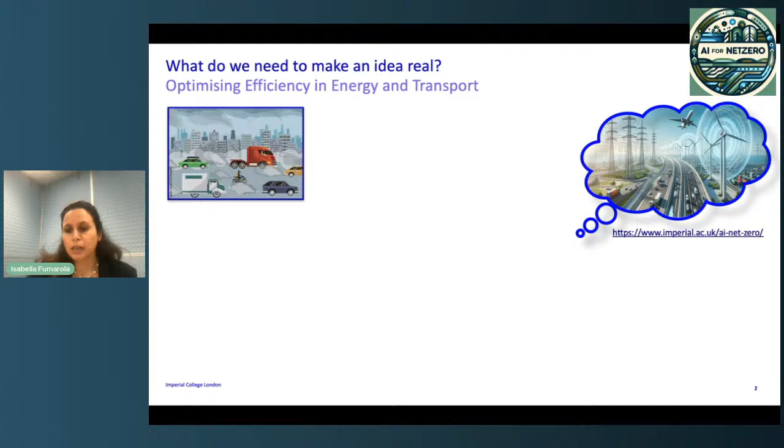The idea is that AI has a lot of technologies now available for different applications. Here are some examples: power, wind turbines, trucks, or planes. The idea is how can we make this theory applicable to real life solutions.

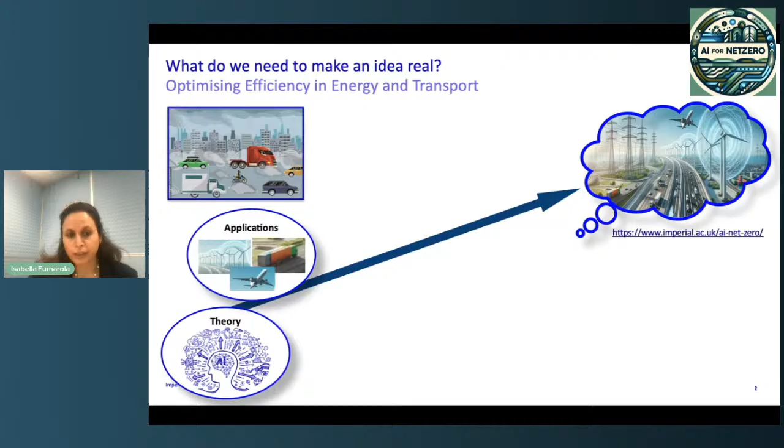What is the missing point to make this real is an experiment or proof of concept. But experiments don't come without challenges - they obviously come with a lot of challenges.

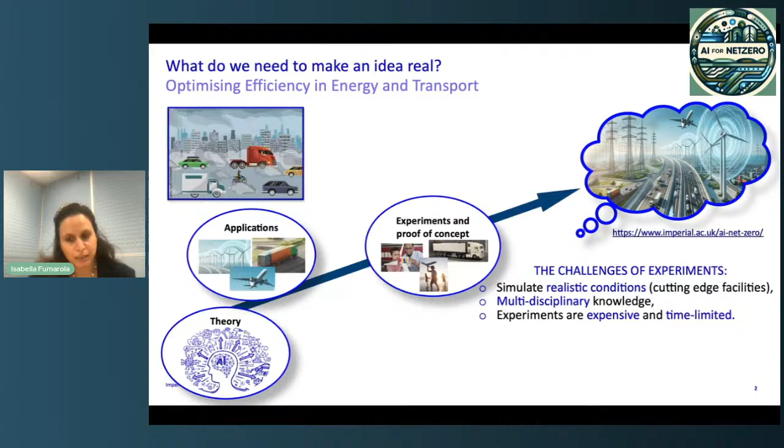First of all, we need to simulate realistic flow conditions, realistic conditions in general. For this, we need cutting edge facilities, and we need multidisciplinary knowledge to carry out any type of experiment. They are expensive and time limited. What I really want to show today is the different elements that build up the experiment to eventually make the solution real.

I said I'm an experimental aerodynamicist, and the first question that can come to mind is why do we need aerodynamics? If you look at all these applications, whether transport or energy source, the common characteristic is that all these systems work in a fluid flow - that can be air, or if we start thinking about ships and submarines, can also be water.

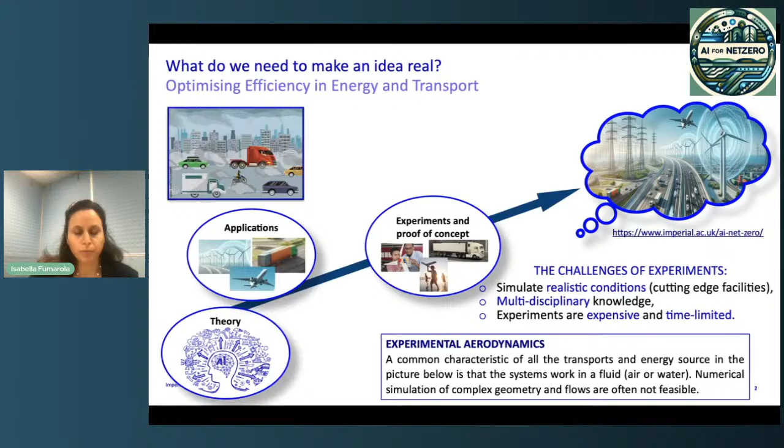Often when you want to go closer to realistic conditions, having a numerical simulation of complex geometry and complex flow is not always feasible. More specifically, the project we are working on in AI for Net Zero is focused on heavy road vehicle aerodynamics.

And the main motivation is that if we look at the greenhouse gases emission, this is 2023 in the UK, what we can notice is that about 35% of the total emission are due to heavy road vehicles and light-duty trucks. And we can also imagine just by looking at the amount of time we order something online, how long it takes, like how many trucks and vans are bringing goods to our houses, how this topic becomes quite important.

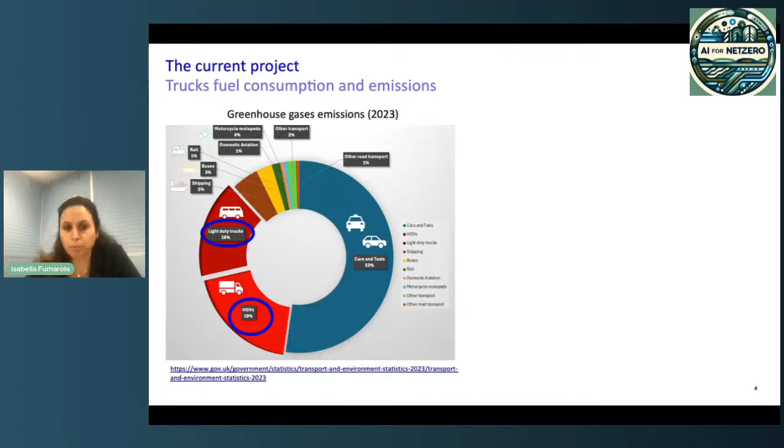And more specifically, if we consider the 50% of the power from an engine of a truck that is used to overcome the aerodynamic drag, so the aerodynamics plays quite an important role in this problem. If we reduce drag by 10%, we can estimate that the fuel consumption will be reduced by 5%, just to give an idea.

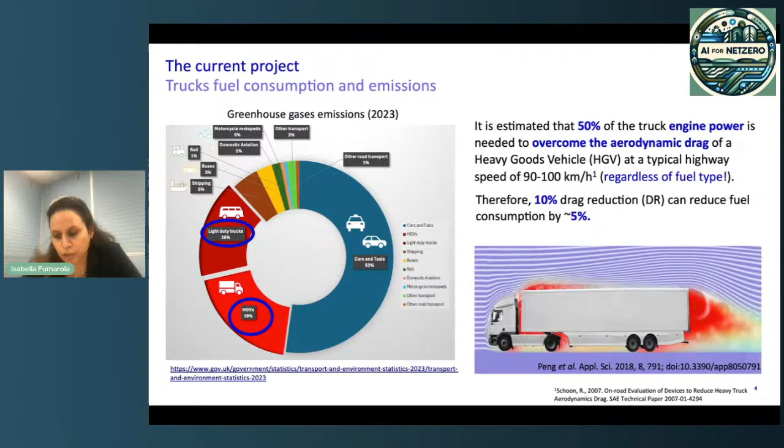So if we look at the flow around a truck, like the one here on the bottom side of my slide, we can see that there are a lot of areas, gaps, and the flow under the vehicle. That is where the flow becomes more detached from the vehicle itself, and it dissipates more energy. But in particular, 25% of the aerodynamic drag comes from the wake, and this is the reason why we mainly focused on the wake.

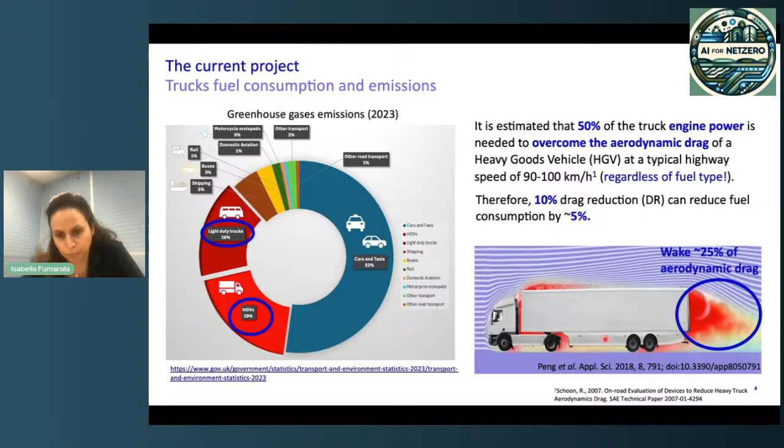In addition to that, you can see that there are a lot of devices like the fairing on top of the front of the vehicle, or this skirting next to the wheel, that have already been implemented to improve the aerodynamics of the truck.

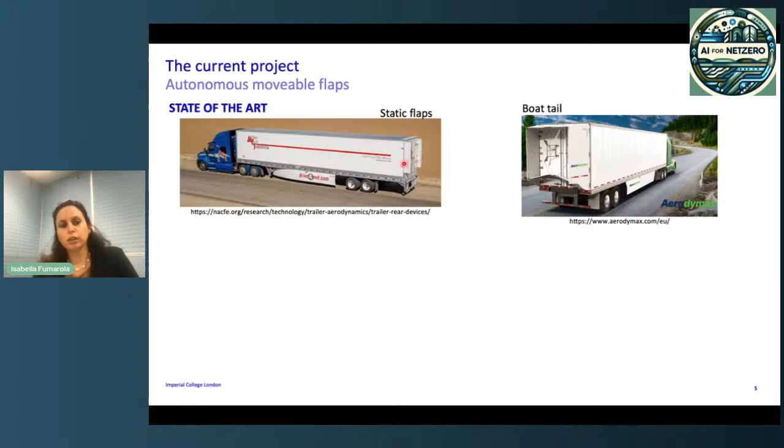So what is the state of the art? Commonly, this type of vehicle are seen more in US, I've been told, than in Europe, but solutions that are actually implemented include static flap or boat tail, and these are static solutions that tend to streamline the flow around the vehicle. But the question is, can we actually do more?

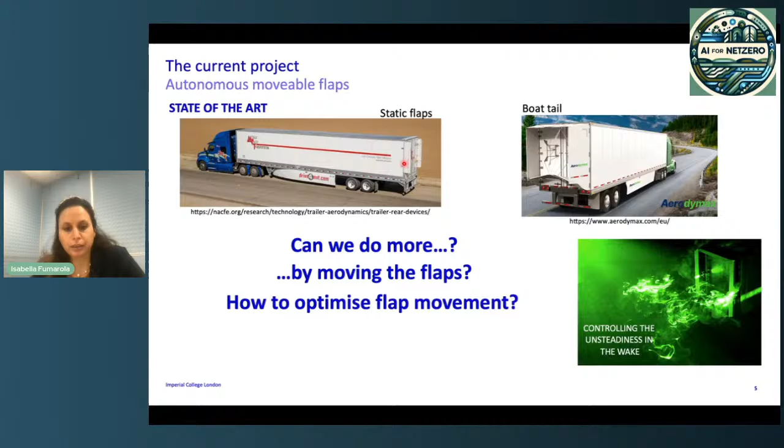And can we do more by controlling the unsteadiness in the wake? Because if you think about fluid dynamics, obviously the flow is very chaotic and is moving and is creating all these little structures that are moving around, and they're responsible for dissipating energy. So can we improve the current solution by moving the flap? And how can we optimize this movement?

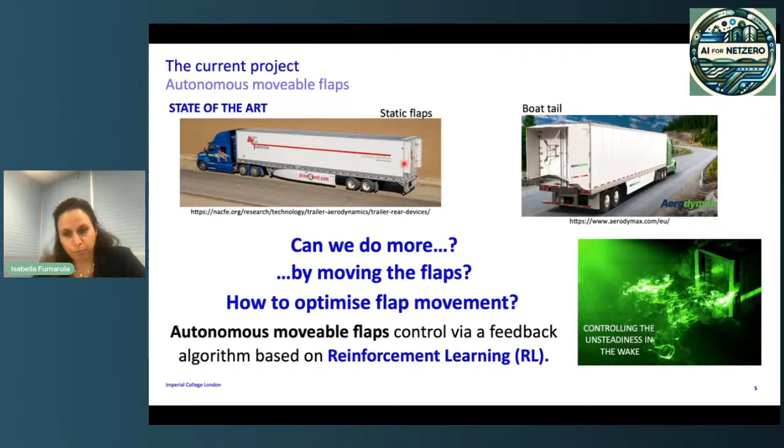Well, what we're doing is that we are looking into applying a reinforcement learning algorithm that can control the movement of the flap via feedback from some sensors that are on the rear of the vehicle. So I mentioned we do this experimentally. The next few slides will explain how we built up our experiment, what's needed, and then I will move to some preliminary results to give an idea of where this project is going.

So the first element for an experiment is obviously the model. So we use a scale truck 1 to 14 because we wanted, as I mentioned, a realistic geometry.

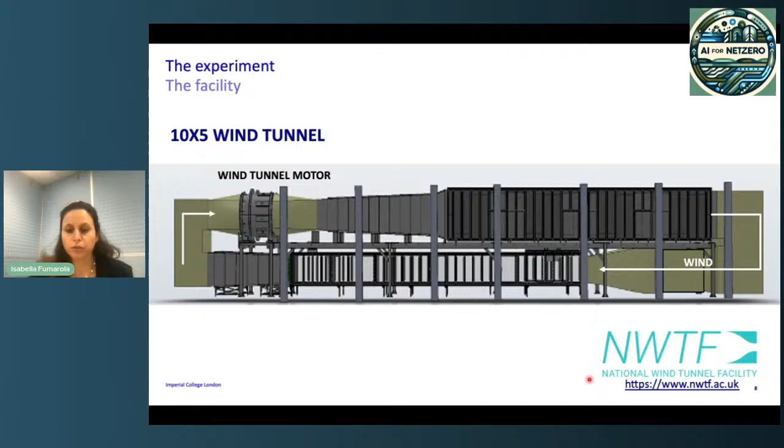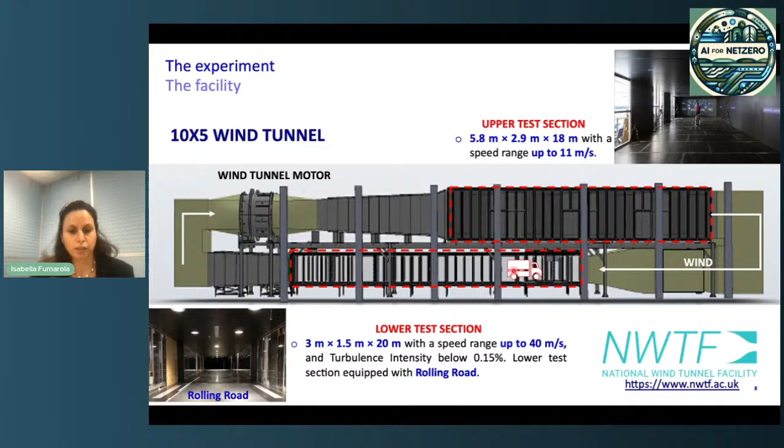It has two test sections, one on the lower part and one on the upper side. The one on the upper side is quite big, it's like 5.8 meters by 2.9, up to 18 meters long, and it can reach up to 11 meters per second. The one on the lower is a bit smaller in section, but it reaches 40 meters per second, and it is equipped with a rolling road. So our truck has been placed in the lower test section, and the rolling road is one of these elements that are needed to reproduce real life conditions.

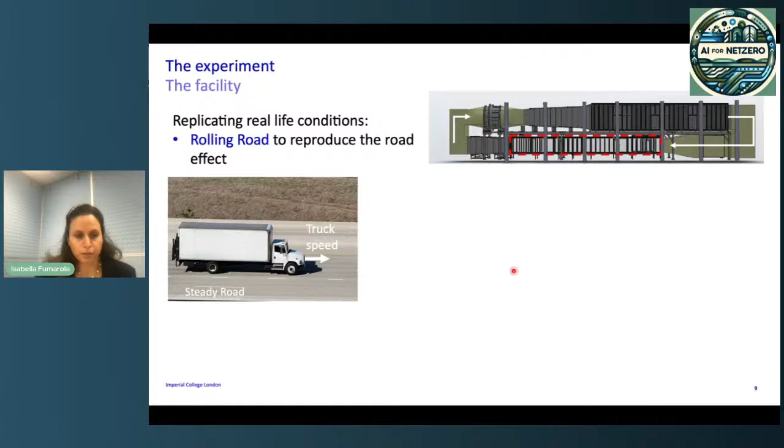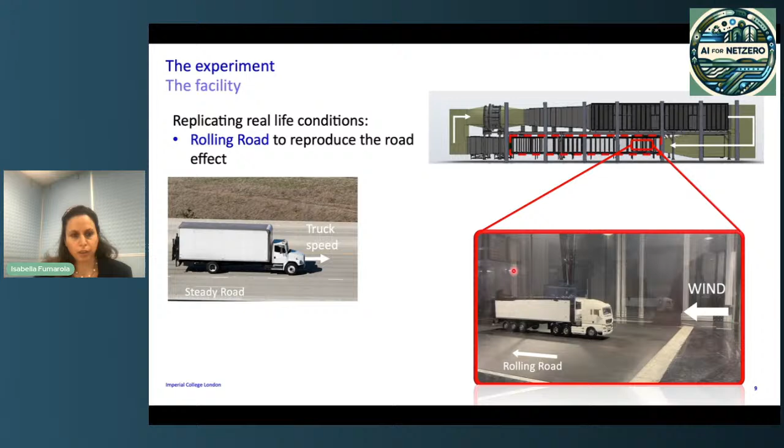So if we look at a truck moving on a steady road in steady air, what happens is that obviously the truck is moving at a certain speed, the road is not moving, and the air is still. When we move to the wind tunnel, the reference system changes because the truck is stationary, but the wind is actually blowing against the truck. And in this case, if we want to replicate the effect of the road, which is normally called ground effect, we have to move the ground, and this is what we can do in our wind tunnel.

Another aspect quite important is what happens if the truck is driving on a road with wind.

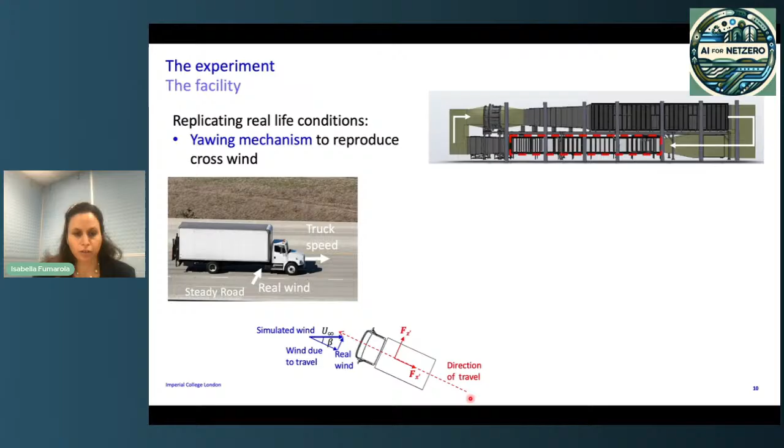So the wind is not still anymore, and it can come from any direction. This is what we normally refer to as the yaw condition, in which the component of the direction of travel is different than the direction of the wind. So what we can do is turn the model by a certain degree and replicate exactly the same condition in our wind tunnel.

Another aspect is obviously measurement techniques. I mentioned pressure and forces, but when we want to investigate the flow field in the wake and understand the flow physics, what we're interested in is measuring the velocity in the wake, in time and space.

This is one example of the measurement technique we used, which is volumetric particle tracking velocimetry. We fill up soap bubbles with helium so they're quite light. When you're in the wind tunnel, they'll follow the wake or the flow around your body, in this case the truck. Then we mount 4 cameras looking at this volume, capturing images in time.

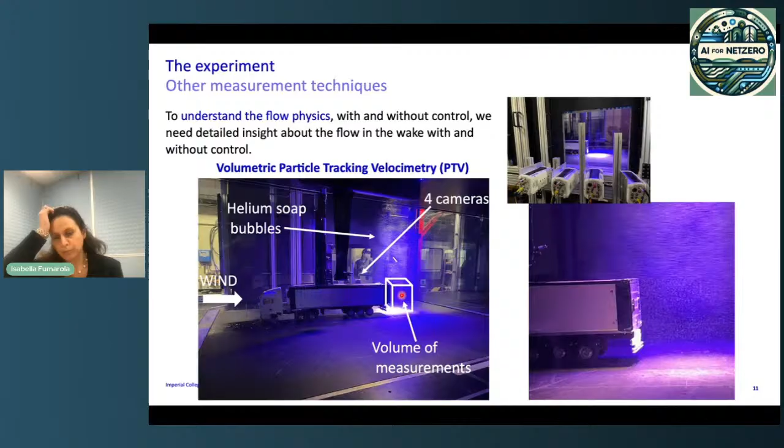They're like high-speed cameras. What you end up having is a number of particles moving around, and at first look they may look chaotic, but you can see some of the vortices.

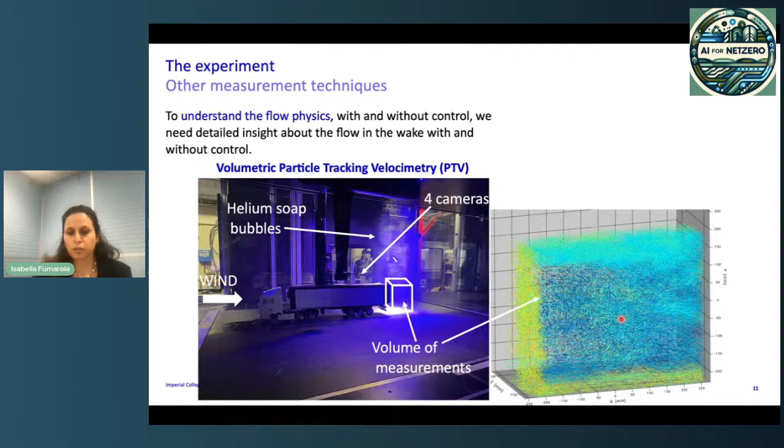When you analyze all these particles in your truck, you can derive the speed of the flow in that particular location. If you look at the mean flow, we can identify the main structures created within the flow you're looking at. So for instance, this is our wake, and we have the primary bubble on top and a second bubble on the bottom.

And with this, I'm going to move to my last few slides about results. The way the project is structured is that we start with a baseline characterization, trying to understand the flow physics and what the wakes look like. The second part has been a static optimization of the flap angle and length. And then I'll show when the reinforcement learning takes over.

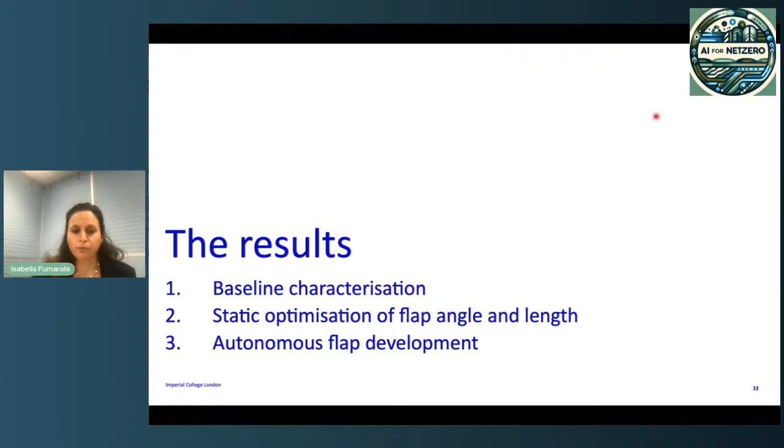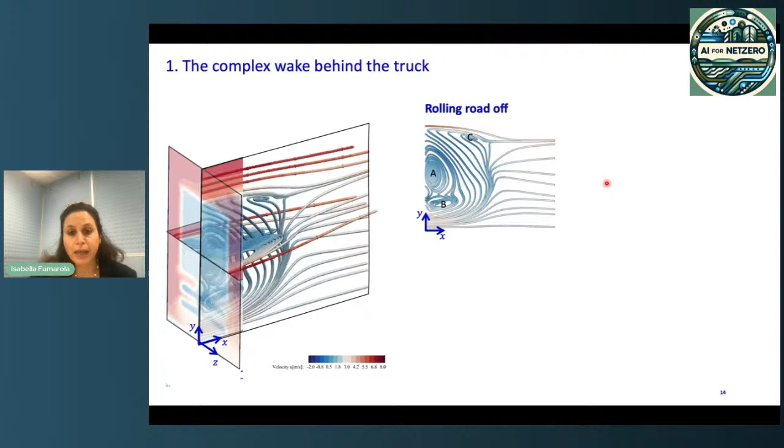So this is the wake behind the truck that I was showing earlier. One thing we can do is compare what happens when the rolling road is off versus when the rolling road is on. This is quite important for us because we can't always keep the rolling road running.

You can see in this case the effect of the rolling road on these vortices in the wake, A, B, and C here on top. The effect of the rolling road is a bit limited, more limited to the region next to the ground.

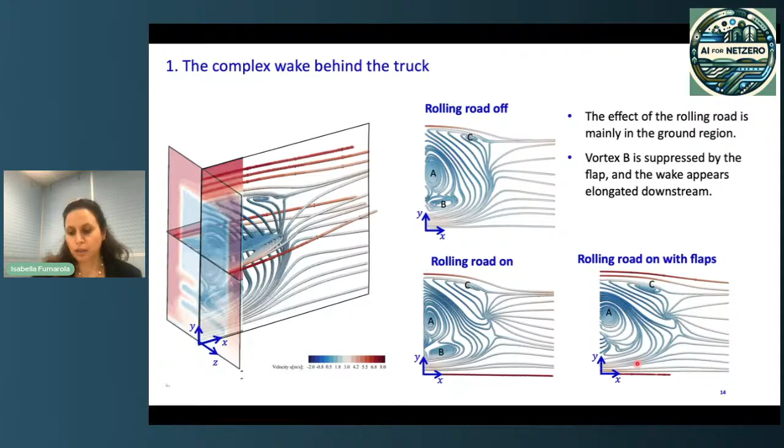Then we put our flaps, which are static, and again we can look at how the wake is modified by the flaps. The first thing that comes to eye is that now the wake is more elongated, and the vortex here on the bottom, which was B, has now disappeared. These are all elements that, with a bit more deeper analysis, will guide us towards understanding why already the static flap can reduce the drag.

Then we can move to static optimization. The idea is, what if instead of keeping these flaps at 0 degree angle, we want to optimize their angle? If you have a vehicle straight to the direction of travel, we can do a simple grid search. We moved the angle by 0.5 degree every time, and studied 4 different lengths. We found that the actual drag force is reduced by more than 20% in the best configuration, which is the one with the longest flap and an angle of 1.5.

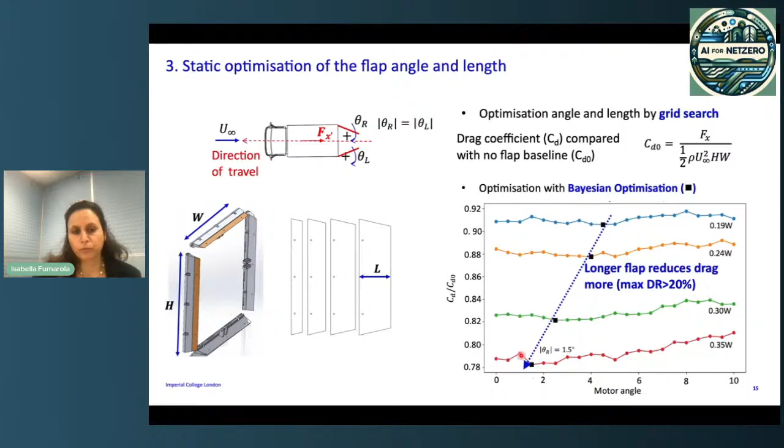Instead of moving each step with a fine resolution, another possibility is to work with optimization code. What we tried was Bayesian optimization, and the square in this plot shows the result of the static optimization for the straight track.

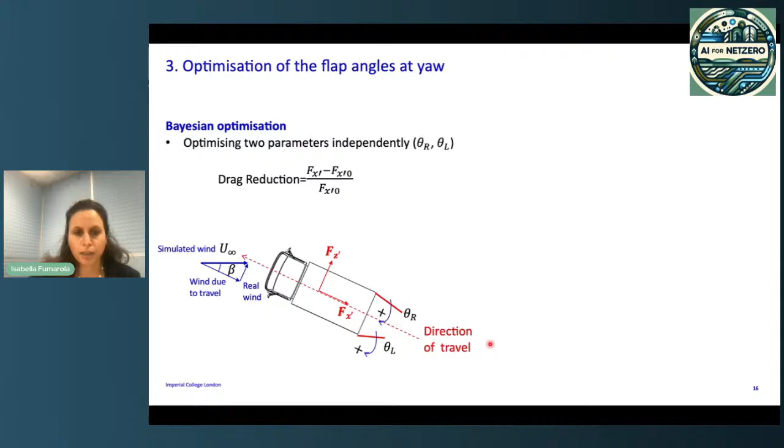Bayesian optimization becomes even more important when you want to study the yaw condition, because in this case the optimal is not necessarily that the two flaps are set at the same angle - they can actually be optimized independently. You have a number of points randomly chosen to start collecting a data set, based on which the algorithm decides the next step to optimize this function.

We can see that compared to the 0 degree case, we get a drag reduction. So instead of keeping the flap straight at 0 degree, if we now put the optimal angle, we increase drag reduction even more, by 1.3%. This is for a small yaw angle. When we increase the yaw angle, the increment we can achieve with an optimized angle at yaw is actually much higher.

But as I mentioned earlier, if we look at the flow in the wake, it's quite dynamic, not static. We use a lot of analysis like PSD or POD to understand how this dynamic part of the wake contributes to the loss of energy, because what we really want to understand is which are the most energetic structures.

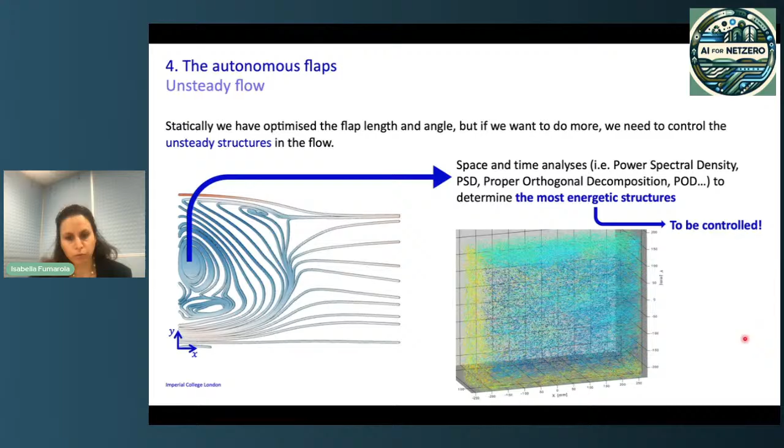Those will be the structures that we want to control. So when we look at the dynamics, how can we now make the flaps move in a way to actually optimize the flow, to reduce the drag?

In this case, we want to use feedback control. So our sensor - the first question is, where can we place the sensor? Obviously we cannot place a sensor in the wake of the truck that is following a vehicle moving on a road, but we need to mount the sensors on the vehicle itself. The first question we have to pose is observability: can we actually use this sensor to observe the state of the wake? That is what we want to control.

The base pressure on the rear of the vehicle, as I showed earlier, is a good indication of the state of the wake. So we use a pressure transducer on the rear face of the vehicle. Then we want to measure the drag, and for that we use a load cell. Our actuators are obviously our motors, which need to be fast enough to respond and control the wake. Our communication also needs to be fast, so we use a real-time communicator.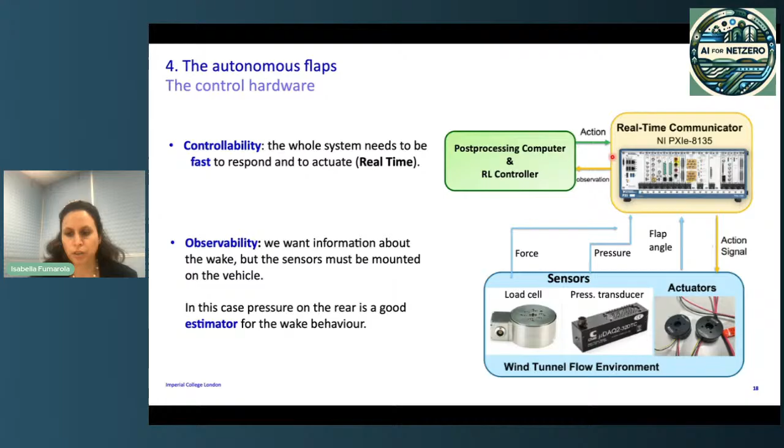We have a postprocessing computer running the reinforcement learning algorithm. Our real-time communicator sends the observation to the computer, and the computer returns the next action, which is eventually fed to the actuators.

A bit more detail on how this works: in terms of the reinforcement learning algorithm, we have our wind tunnel, which is the environment, and the state of the wake, measured by the pressure transducer. The agent decides which action to take at a certain time interval, which determines how the flaps need to be moved. This information is fed back into the environment, and if the effect is positive, an according reward is sent back to the agent, which decides the next action.

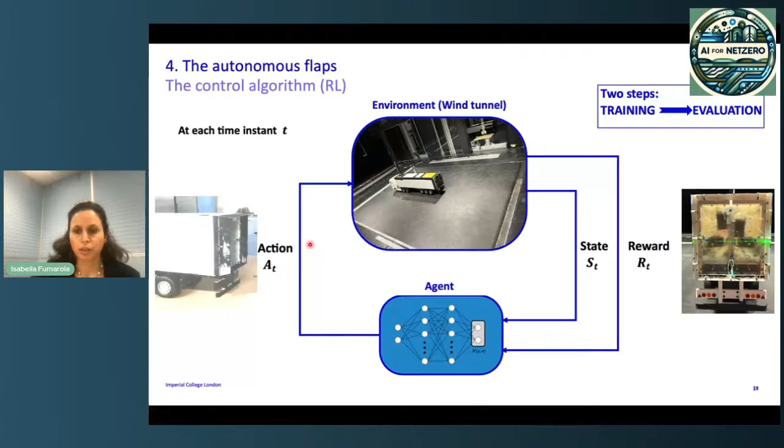The way this works is divided into two steps: one is training, one is evaluation. In the first step, the algorithm trains itself, and then, during the evaluation stage, it confirms what the training has suggested.

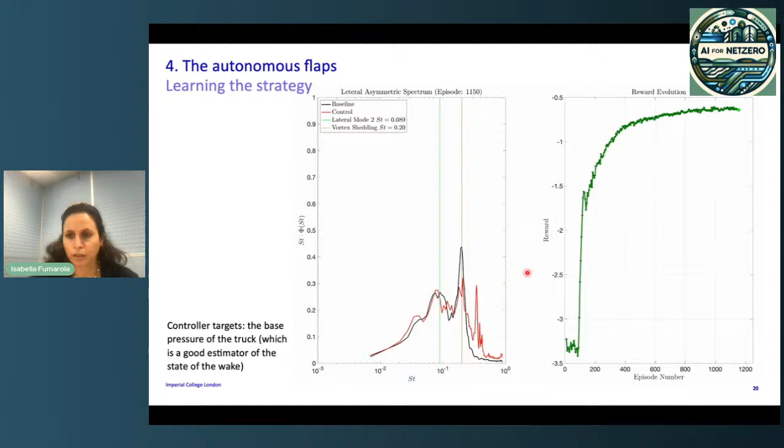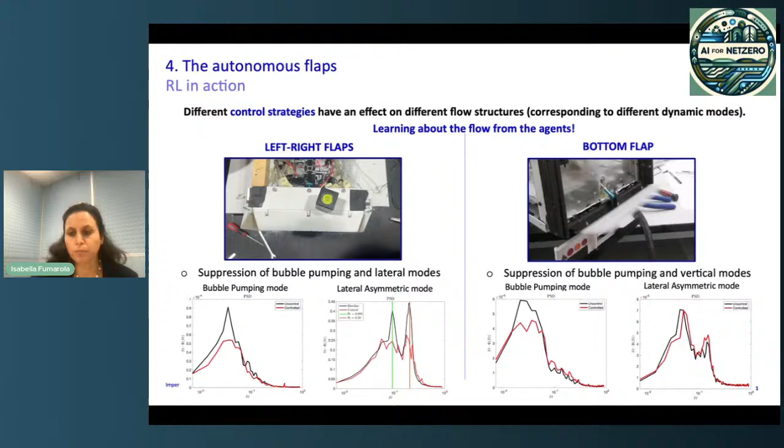Depending on whether you're using the left and right or the bottom flap, for instance, there's also an element of learning from the agents, learning something about the flow and how you can control the flow. And with this, I think I'm getting to the conclusion of my talk.

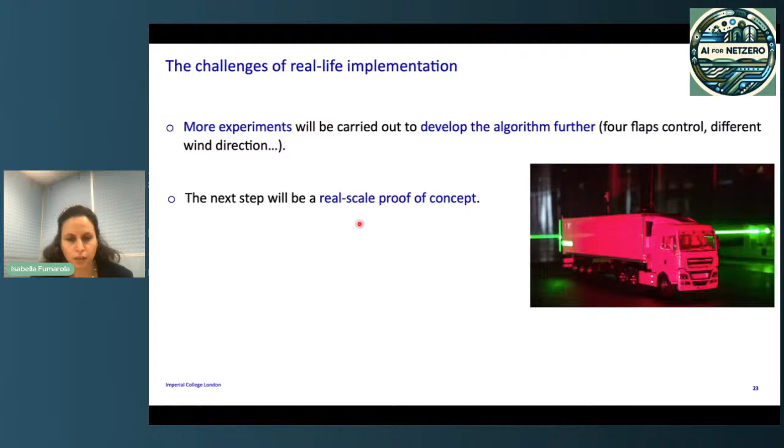And then the next step of this project will be to start looking at real scale proof of concept, because scaling these things is not obvious. And we would also like to see this technology implemented on real trucks in the future. We wish that, and obviously there are a lot of practicalities that need to be addressed.

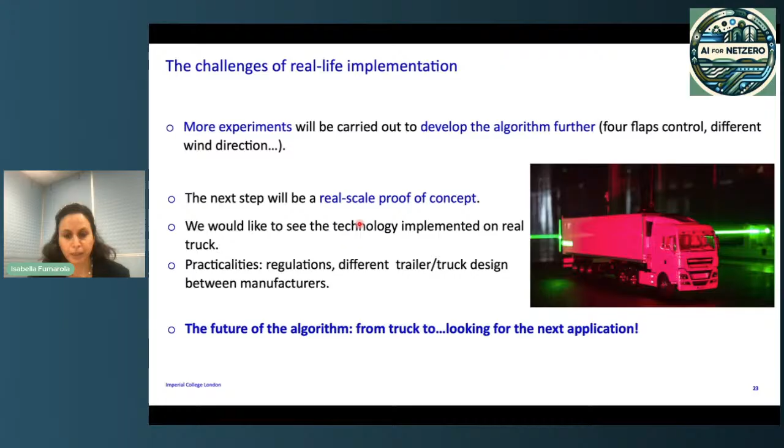And finally, what is the future of the algorithm? Because what we learn by optimizing the flaps behind the truck is obviously coming very useful for different aerodynamics problems. So we are looking for the next application. And with this, I'm going to conclude.

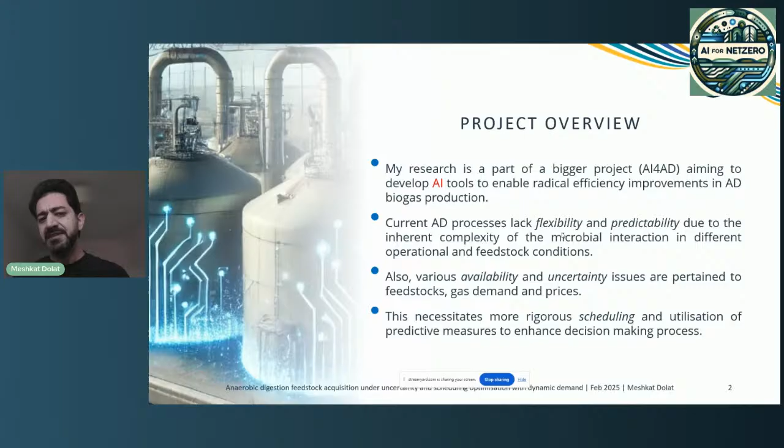My work, which is the first work package of the whole project, can be categorized into two phases. In the first phase, I've developed a platform that takes into account different feed characteristics and properties such as locations, availability, weights, seasonality, and different substrate characteristics and GWP factors, etc. This platform operates under two consecutive functions: co-digestion and scheduling.

Co-digestion calculates the biomethane yield due to synergistic effects. The scheduling function takes all the data from the feed and co-digestion function and suggests a feeding pattern that matches the future gas price. The platform assesses the effectiveness of gas storage in terms of flexibility and adding to the profitability of the plant.

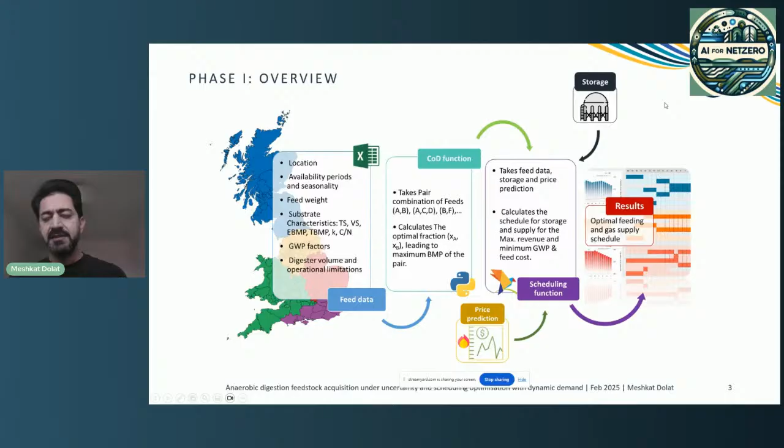All these features are elements that we've incorporated in this platform to enhance the decision-making process. Looking back at the co-digestion function, it is written in Pyomo and follows a nonlinear programming style.

The model is based on a surface response model that computes the optimal blending recipe according to the model proposed in a reference work. The objective is to identify the optimal feeding ratio that leads to the highest biomethane yield.

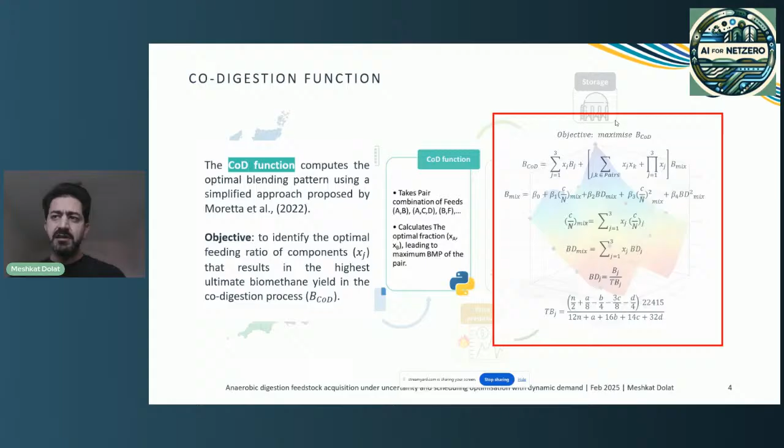The platform allows substitution of the aforementioned surface response model with AI models, provided access to sufficient amounts of microbial community and growth data. What I need to emphasize is that in this work package I've developed a scaffold for integrating AI tools into the anaerobic digestion optimization and decision-making process.

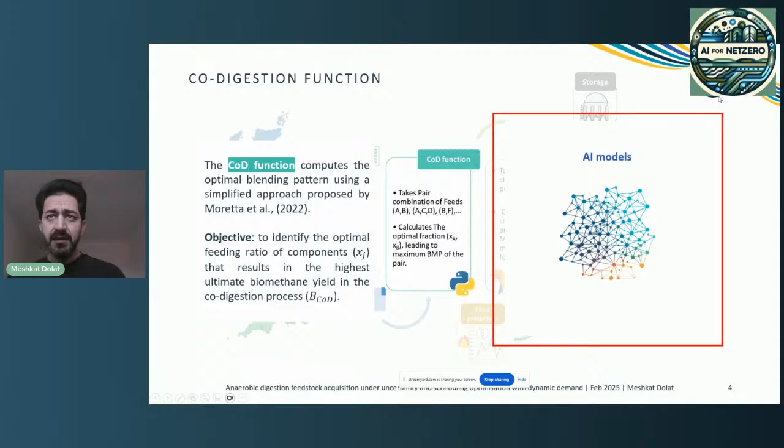The next function, which is the scheduling, is written as MINLP. The biogas production model currently utilizes a simple mechanistic model, and the price prediction is based on some fixed parameters and assumptions now.

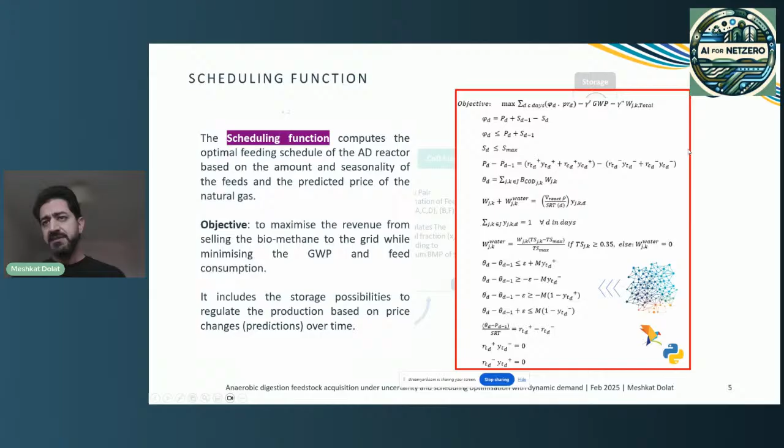However, they will both be replaced by AI algorithms trained on bespoke data sets for each AD plant. Depending on the AD plant's bespoke conditions, reactor size, and feedstocks, the AI tool will be trained to yield a set of bespoke trained models that can be fully integrated into these platforms and enhance the decision-making process.

For evaluation of the model and validating the results and usefulness of the model, we did a case study. This study covers three different time periods of natural gas price fluctuation, which we categorized as low, mid-range, and high-range prices. These prices were determined according to Ofgem data from February 2021 to February 2024.

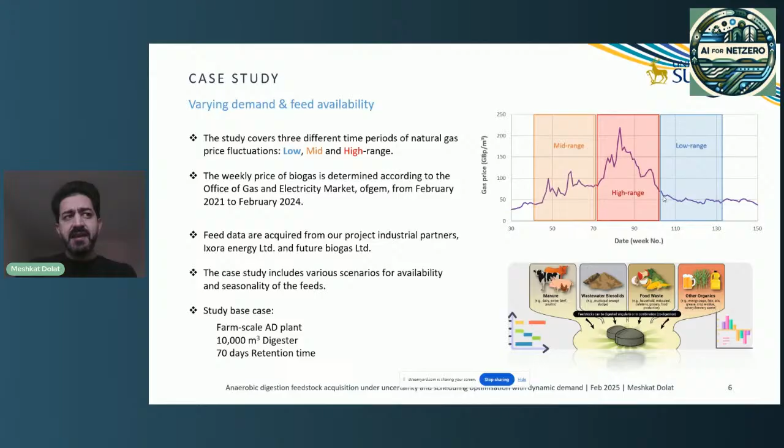Feed data were acquired from project industry partners such as Ixora Energy and Future Biogas. This case study takes into account different scenarios for availability and seasonality of the feeds, and is based on a farm scale AD plant.

Here are the results from the co-digestion function. This graph illustrates the distribution of cost and biomethane potential for different feed blends. For this example, it's a two-component system. This results from the co-digestion function and specifies the changes to the biomethane potential of each blending recipe and its contribution to cost. Ideally, we're looking for feed blends with maximum biomethane and lowest cost per weight of the blend.

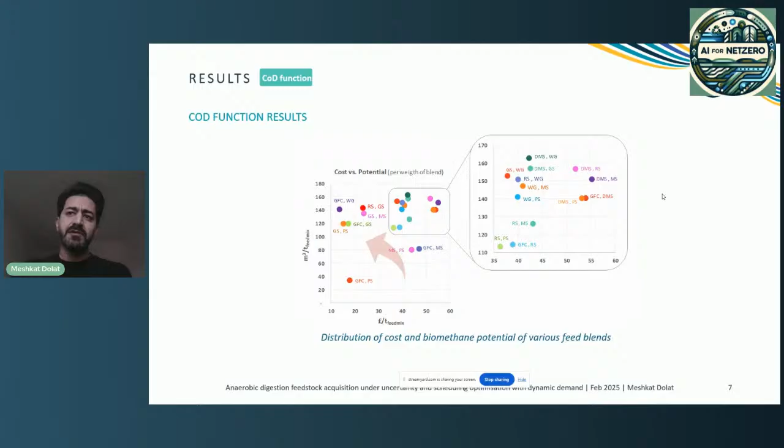Now here you can see the optimization results and the suggested schedule for the predicted gas price in the low frequency zone, for example. The top graph shows the optimal schedule and production profile without taking into account feedstock acquisition and GWP effect, while the bottom one shows the effect of including the GWP.

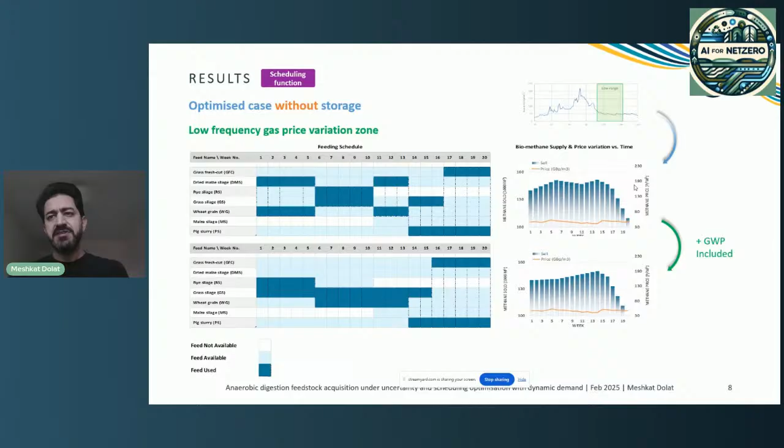At this stage, no on-site storage has been considered for the results, and you can see the adaptability of the production to the demand. However, it is limited due to the low flexibility nature of the AD process, which is usually running on a relatively high solid retention time.

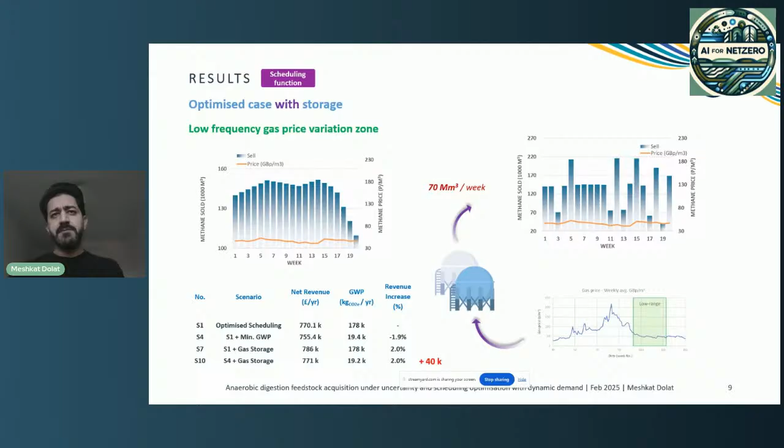In this slide, you can see the effect of manipulating the grid supply by the aid of mass storage facilities, which here is actually the cryogenic cycles. So we're using the cryogenic processes to mass store something like 10,000 cubic meters of gas per day. As you can see, the revenue from this manipulation of the grid supply has increased by 40,000 pounds annually in the low frequency zone, in the lowest possible fluctuations of the prices of the gas.

Now, if we move forward to other price zones, such as medium or high frequency zones, these are the prices that have been experienced in different intervals. As you can see, inclusion of the mass storage facilities can earn up to more than 300,000 pounds a year, which is massive.

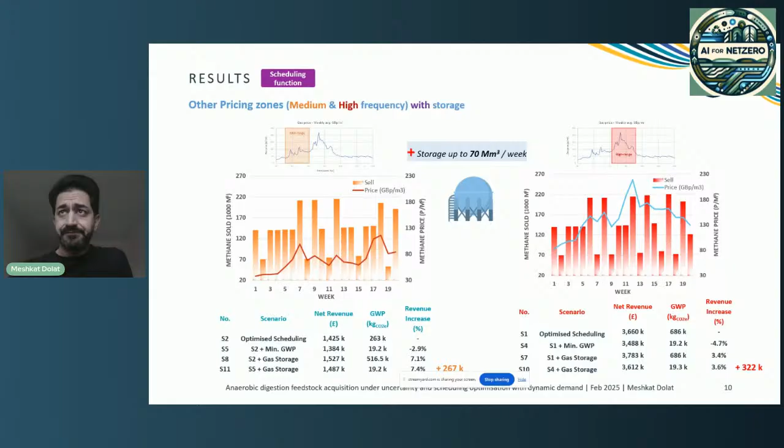So in terms of the storage and inclusion of bio-LNG and cryogenic cycles, we need to say that large storage of methane for price matching and grid supply optimization has been achieved through these liquefaction cycles. At the moment, we need to pay attention to the fact that currently biogas upgrading processes use membrane filters, which do not allow us the CO2 storage possibilities. Now, with the inclusion of the liquefaction cycles, we can perfectly facilitate this separation of carbon dioxide from the biogas and store them in a liquid form or in a gas form, whichever is convenient for us.

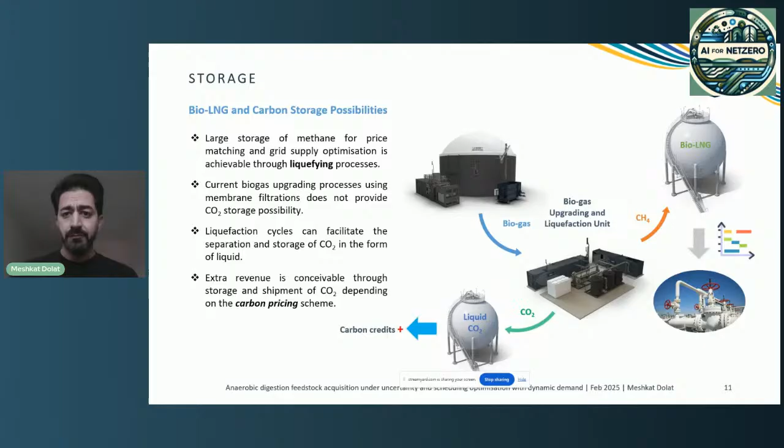So we assume extra revenue can be achievable through these kinds of processes, so that we can liquefy, store, or ship these captured carbon dioxide elsewhere and earn more revenue because of the carbon pricing schemes.

Now, for the second phase of this project, we focused on feed acquisition and the uncertainties associated with it. These uncertainties include variations in quality and quantity. By quantity I mean the crop yield, and by quality I mean something like the total solid, the biomethane potential of different crops.

Additionally, market price fluctuation under different scenarios has been taken into account. These uncertainties are largely influenced by external factors such as weather conditions, soil quality, economic trends, etc. This creates significant challenges for decision making, as choices must be made in advance while accounting for unpredictable circumstances in the future. So a key challenge for AD plants nowadays is developing a systematic and robust approach to mitigate the impact of these kinds of uncertainties.

So to address these kinds of concerns, we employ stochastic optimization to enhance the decision-making process. Our approach determines optimal land allocation strategies, and we've outlined viable courses of action once these uncertainties materialize in the future. So a significant advancement in this phase is the integration of these kinds of uncertainty considerations into our previously developed platform.

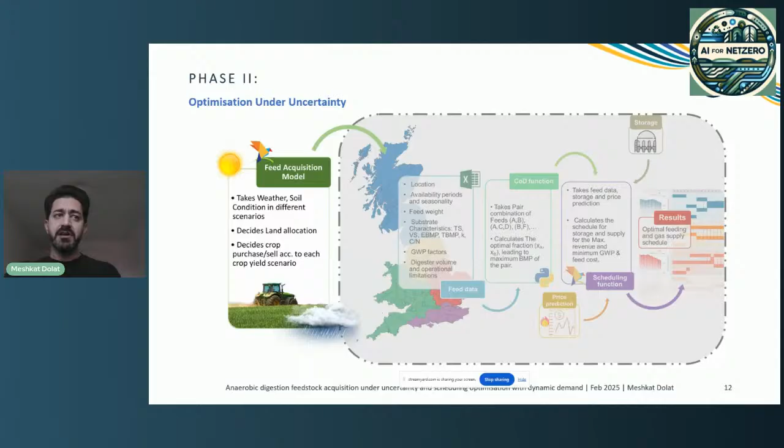This enhancement incorporates co-digestion constraints, digester feeding limitations, and also variations in the gas prices, so that we could be ensured that the feed acquisition planning is both economically and operationally viable.

So this two-stage optimization framework, this is a stochastic optimization framework, we have to make decisions in two steps. In the first phase, first decisions are made before the uncertainty in crop yield is revealed. This involves deciding how to allocate land for planting and balancing the expected costs and potential profits. So the objective here is to minimize the planting cost while maximizing the expected profit from the crop sales in future.

Now, the second stage, which we call recourse decisions, are made after uncertainties such as actual crop yields, quality of the yields, and market conditions become known. These decisions allow operators to adjust their strategies to mitigate the impact of the unexpected changes, for example, by selling or storing the surplus amount of yield or externally purchasing the required feed. So the key advantage of this approach is the fact that it can integrate flexibility into decision-making, making sure that even if unforeseen circumstances occur, the system can still adapt to maximize efficiency and profitability.

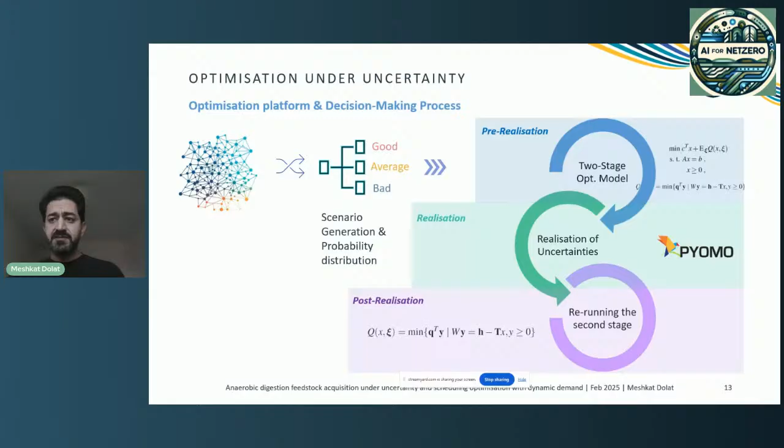So in general, it can be quite adaptive and robust, which can lead to more realistic and resilient and efficient AD feedstock management and process.

So this model is designed to function after the uncertainty is resolved, meaning that when the actual scenario becomes known to us, the optimization is reapplied to refine feeding schedules and operational decisions. And the model can adapt itself to update the gas price prediction to ensure maximal profitability under real market conditions.

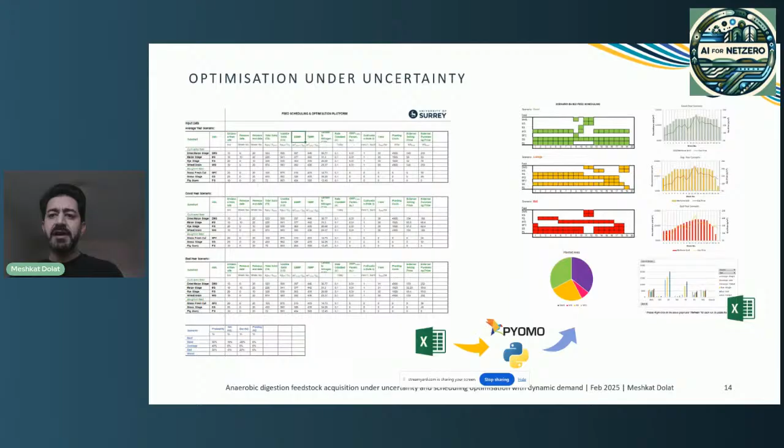So that brings us to the end. I'd like to express my gratitude to the University of Surrey and AI for AD team for the collaboration on this project. Special thanks to Dr. Michael Short for spearheading this very interesting project, as well as our industrial partners such as Future Biogas and Exora. And I would like to also extend my sincere appreciation to the AI for Net Zero team for providing me with the opportunity to present my work.